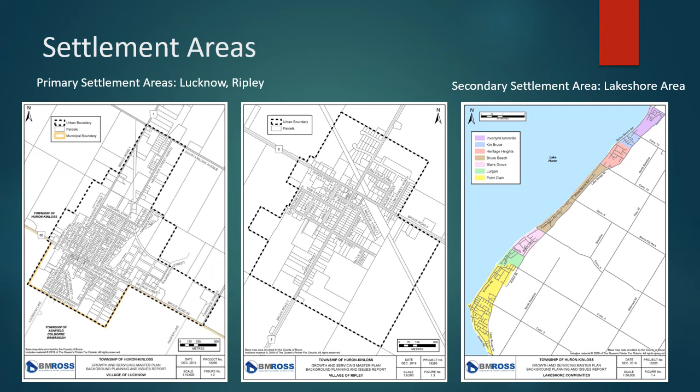For the master plan, we looked at a range of growth forecasts to determine what low, medium, and high growth might look like over the next 25 years in the settlement areas in Huron-Kinloss. The low forecast is based on the annual average number of building permits that have been issued for each area over the last 10 years. The medium forecast is a forecast that was done for the Nuclear Waste Management Organization as part of their base condition studies and is a forecast for Huron-Kinloss. And the high forecast are projections for Huron-Kinloss done by the County of Bruce for their official plan update.

For the medium growth forecast, the population for the township as a whole is forecasted, so we had to allocate the growth in terms of population and households for the different settlement areas based on the current distribution of the population. In addition to looking at the population, we also forecasted the number of new houses in terms of equivalent residential units, or ERUs. One ERU is equivalent to a single detached home, and an apartment, which generally tends to have fewer people and therefore lower sewage and water flows, is a little more than half of an ERU. So you will see this term throughout our presentation.

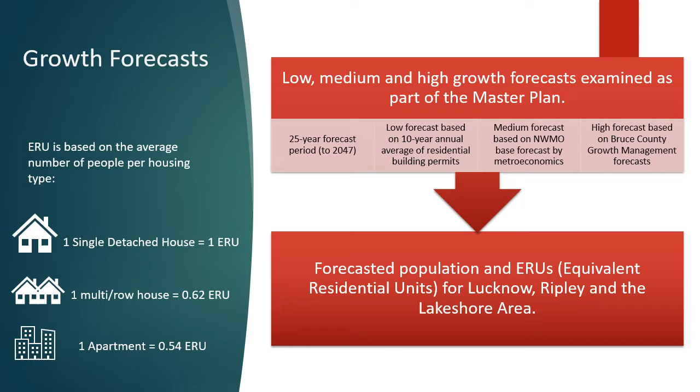Currently in Lucknow, there are 91 units proposed for development, with an additional 42 existing lots that could be built upon. There's also approximately 50 hectares of land that's either zoned residential or future development, which could accommodate over 750 additional residential units. These development areas are shown on the map on this slide. Given the amount of land available and forecasted growth, it does not appear that an expansion to the settlement area of Lucknow will be required over the next 25 years.

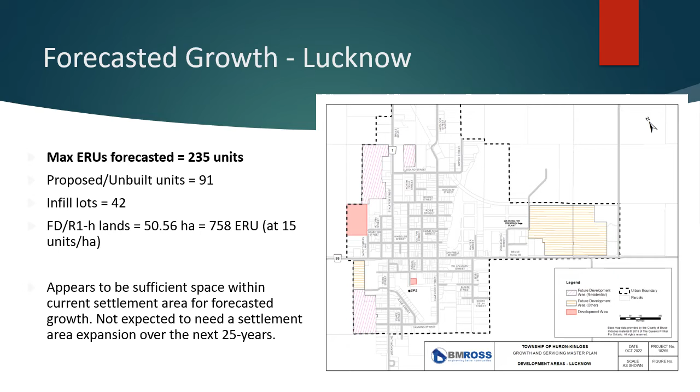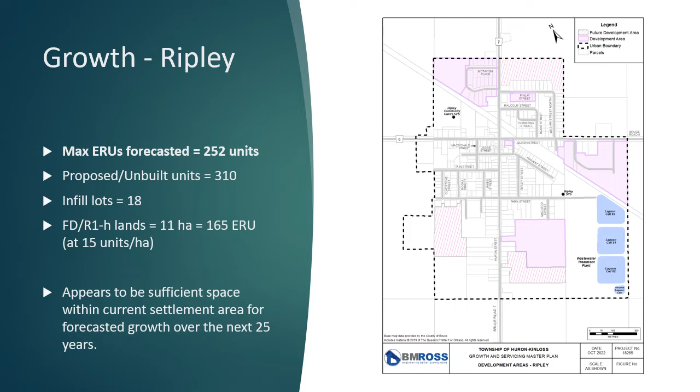In Ripley, the number of new residential units forecasted over the next 25 years ranges from 75 units on the low end to 252 units under the high growth scenario. This map shows the potential development areas in Ripley. Currently, there are 310 units of proposed development with 18 infill lots. There are 11 hectares of land zoned either for future development or residential development. Given that the high growth forecast is 252 units over the next 25 years, and the high number of potential lots in the community that could develop, there appears to be sufficient space in the current settlement area for the next 25 years of growth.

Moving to the lakeshore area, you can see the forecasted growth is much greater compared to Ripley and Lucknow, with the low forecast projecting 584 additional residential units over the next 25 years, and the high growth scenario forecasting an additional 666 units. Historically, most of the growth in Huron-Kinloss over the last 25 years has occurred along the lakeshore. This is likely due to the availability of land as well as a desire to be close to the lake as well as Kincardine. Over the next 25 years, it's expected people will continue to want to build and live along the lakeshore, and that there will be high demand in this area.

Currently, there are approximately 140 proposed and unbuilt units in the lakeshore area, as well as 195 existing vacant lots. There's approximately 42 hectares that's zoned residential, which, assuming a density of 5 units per hectare, would accommodate an additional 210 ERUs. Given this, over the next 25 years, there appears to be a deficit of land to accommodate the projected growth in the lakeshore area. If we look at the high growth forecast, the additional space required to accommodate the forecasted growth is about 24 hectares or 60 acres. This will likely require an expansion of the settlement area boundary over the next 25 years.

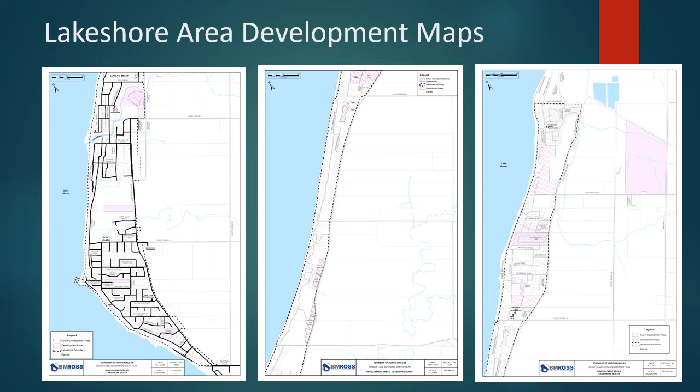When an expansion to the lakeshore settlement area will be needed will depend on the progression of development, or how fast development occurs. But before it can be expanded, a settlement capacity study will be required, as well as amendments to the Bruce County and Huron-Kinloss official plans.

As part of the background report, we looked at what constraints and opportunities there may be related to an expanded settlement area in terms of a potential location along the lakeshore. Some parts of the lakeshore have a very defined physical boundary created by the hill or shoreline bluff, and there are other constraints that we also considered, including hazard lands, wetlands, woodlands, as well as minimum separation distances from existing barns. We also needed to look for areas near existing infrastructure, as leapfrogging development is generally frowned upon from a planning policy perspective, as well as not being a very efficient use of infrastructure or very cost effective.

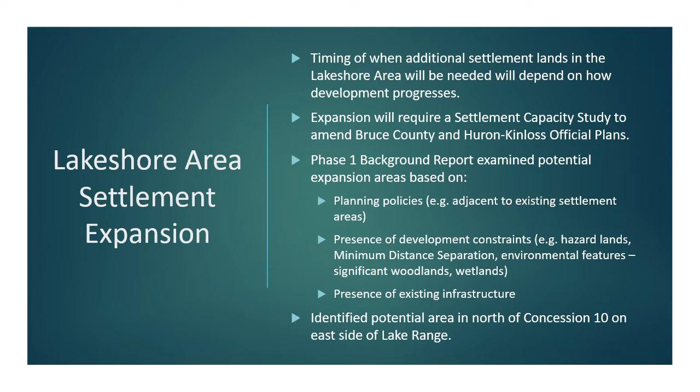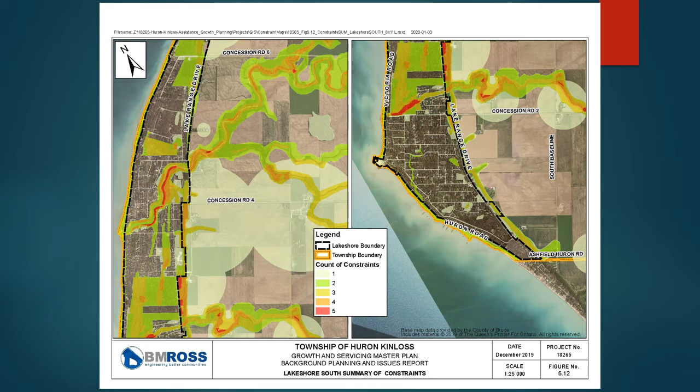In order to find areas where there may be fewer constraints, where there might be an opportunity to expand the settlement area, we created maps where we essentially layered on different constraints. The red and orange areas have more layers of constraints than the lighter green areas on these maps. These particular maps show the areas from Concession 6 south to Amberley Beach. Between Pine River and Concession 2, the area east of Lake Range is constrained, and this is primarily due to minimum distance separations from the barns that are there, which would make residential development in this area particularly unlikely, and there are also hazard lands associated with the Pine River.

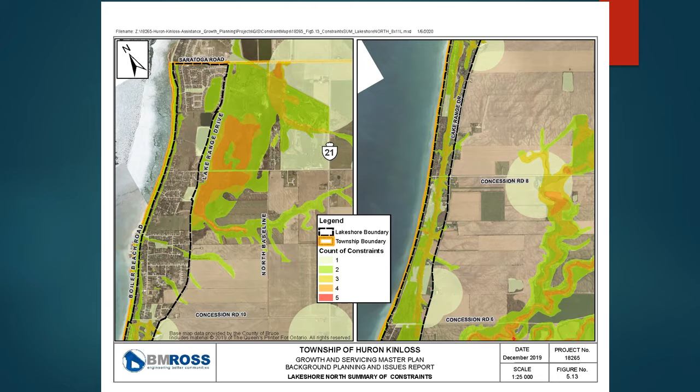North of Concession 10 on the east side of Lake Range is a potential area for future consideration of a settlement area expansion. As we can see, there's relatively few constraints there, and it is near existing infrastructure and well away from any existing agricultural facilities. I'm now going to turn it over to Andrew to discuss the reserve capacity analysis.

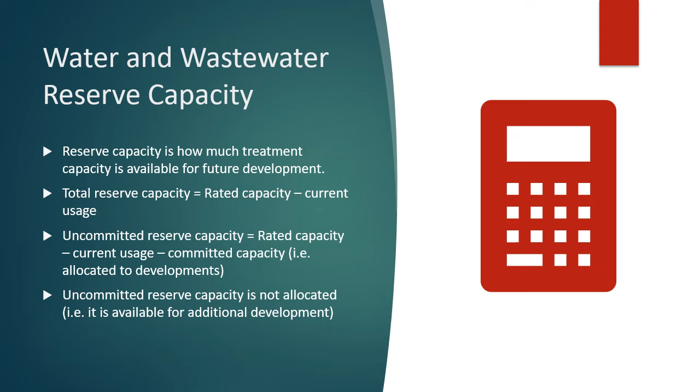When analyzing the potential impact of growth on existing water and wastewater infrastructure, and assessing needs for new or expanded infrastructure, we talk about reserve capacity. This is focused on treatment for both water and wastewater. Water storage is also assessed, though in a slightly different method. Total reserve capacity is effectively what amount of a treatment plant's capacity is not being used by existing real customers. Uncommitted reserve capacity is calculated as total plant capacity, subtract the existing usage, and subtract the usage that's forecasted for development commitments. Existing usage is taken from recent actual data, and forecasted use is based on typical water demands or wastewater flows for an equivalent residential unit, or ERU.

This table summarizes available or rated total capacity for major water and wastewater infrastructure. It also summarizes current usage, current total reserve, and how much of that reserve is allocated to commitments. Finally, the uncommitted reserve in terms of cubic meters per day, as well as what number of ERUs that cubic meters per day represents. Key takeaways from this slide are, for water supply, all systems have a significant uncommitted reserve. The Lucknow Wastewater Treatment Plant is operating at approximately 75% of its capacity. More than half of the current total reserve is committed, with the uncommitted reserve being sufficient for an estimated additional 100 ERUs.

The Ripley Wastewater Treatment Plant is operating only at about 60% of its capacity, but there is nearly as much committed capacity as there is existing actual usage at the plant. As a result, there is a perceived deficit of nearly 100 cubic meters per day of reserve, which in this case is also approximately 100 ERUs. The next several slides will illustrate each of the water and wastewater treatment system capacities and projected usage over time as growth occurs. Graphs will illustrate capacities in terms of current ERU usage values.

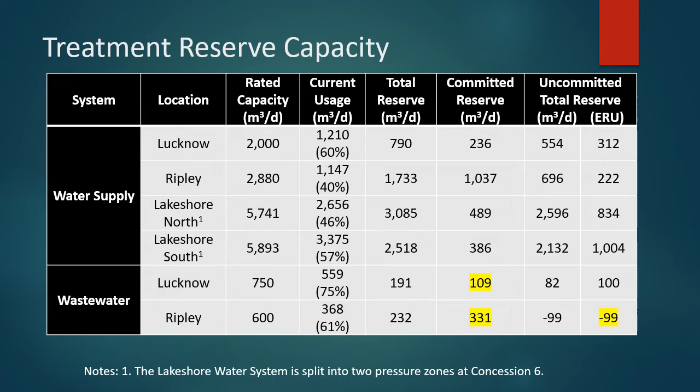Lucknow water treatment capacity. Looking at the left-hand side of the graph, currently we can see there are approximately 675 ERUs serviced. The committed capacity is a little over 800 ERUs, whereas the total capacity would allow for over 1,100 ERUs. At even the most aggressive growth forecast, the existing system capacity would be sufficient beyond the year 2045. Therefore, there is no apparent need for capacity expansion at this time. It is noted that well number 5 is not in an ideal location due to its site size, and replacement would likely occur at an alternate location yet to be determined.

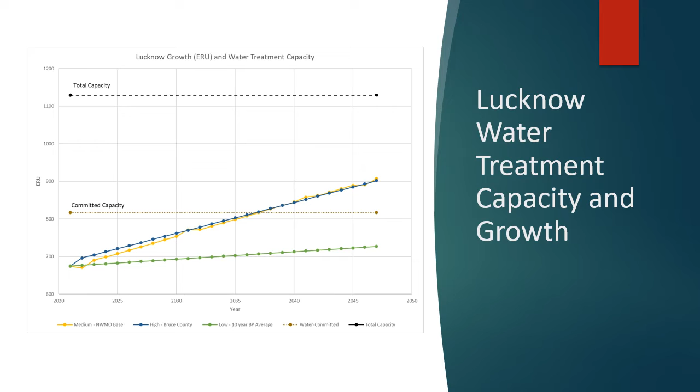Lucknow wastewater treatment capacity. The same existing and committed ERUs apply as for the case of water treatment. Even though uncommitted reserve is sufficient for only 100 additional ERUs, at even the most aggressive growth forecast, the existing system capacity would be sufficient just beyond 2045.

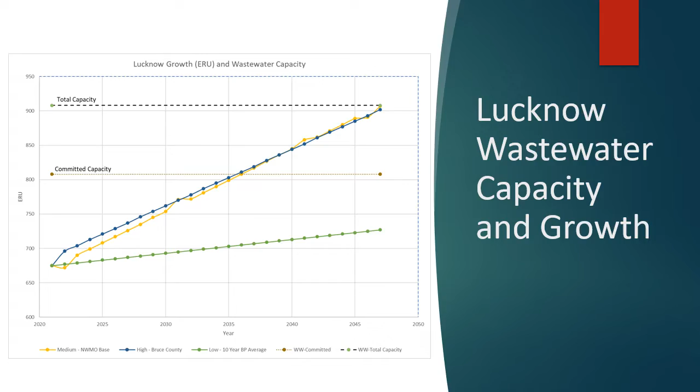Ripley water treatment capacity. The total capacity of the system is significantly greater than the committed capacity. It is again noteworthy that committed capacity in Ripley is nearly double the actual current usage, due to the large number of development commitments that create no real demand at this time. At the most aggressive growth rate, the system capacity would be sufficient well beyond 2045.

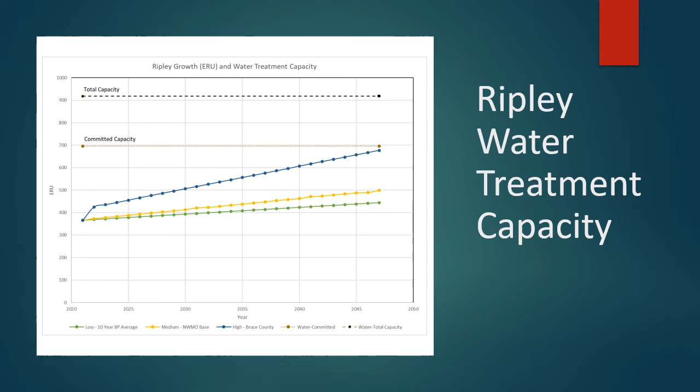Ripley wastewater treatment capacity. This plant is considered to be overcommitted, despite current flows being well under the total capacity. Though the number of development commitments is large, the fastest growth rate projection forecasts that actual flows to the plant would not reach the current rated capacity until approximately 2039. It is recommended that this situation be monitored with regular updates to the reserve capacity calculations.

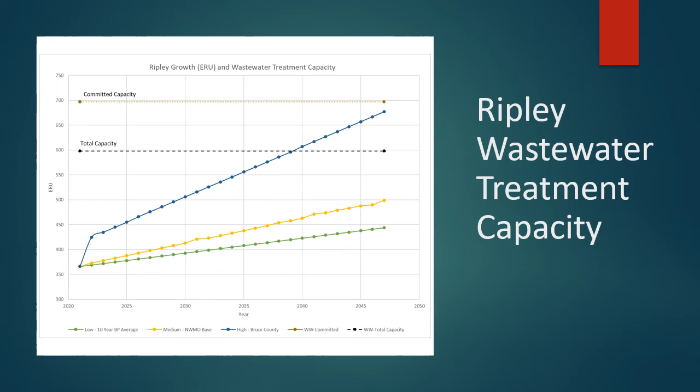When planning for future plant expansion, it will be important to keep in mind that the process, all the way from class environmental assessment to completion of construction, may take 3 to 5 years. Lakeshore water treatment capacity. The total capacity of all well subsystems in this drinking water system is substantially greater than current, committed, and forecasted demands.

Looking at water storage capacity, the storage facilities for all 3 drinking water systems were reviewed. Ripley has a relatively new elevated water storage tank, and there will be a new elevated water storage tank in Lucknow in the near future. In both of these communities, the new tanks have sufficient volumes for decades of forecasted growth.

The lakeshore drinking water system has a single water standpipe with a total volume of approximately 1,500 cubic meters. The actual volume available to the system will be less, depending on the location of the demand, due to pressure loss as water flows from the storage facility to the location of the demand.

Regardless, even if the full volume of the lakeshore standpipe were available for use, it would be less than that recommended by Ministry of Environment, Conservation and Parks design guidelines for drinking water systems. The recommended value for existing customer base plus commitments is nearly 4,500 cubic meters, or 3 times the current standpipe volume.

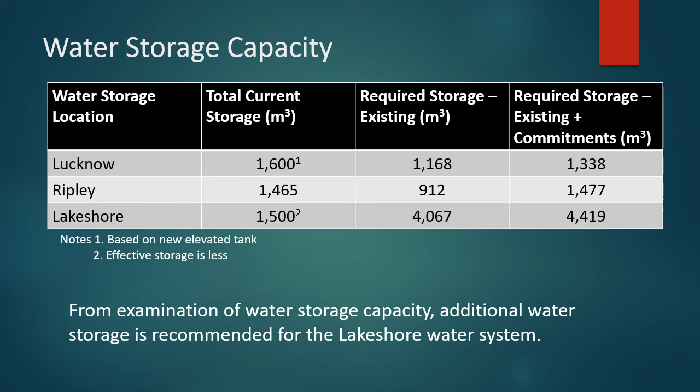In summary, for the Ripley water storage and treatment analysis, the existing infrastructure is considered adequate for the forecasted needs. For wastewater treatment, the plant is considered overcommitted. There are a number of items the township may want to consider in this regard. One would be to implement an allocation policy.

The goal would be to avoid being in the current position, where the township is committed to provide servicing capacity without any way of knowing when the subject development lands will actually be developed, and no mechanism to recover that committed capacity for developments that don't proceed in a timely manner. This could be achieved by having a time frame during which approved developments must occur, or else committed capacity is lost, or by having developers pay upfront to be granted capacity allocation.

We also recommend the township review the reserve capacity calculations on a 5-year basis at most, and more frequently if development begins to occur at faster than forecasted rates. Wastewater treatment plant capacity expansion may be required in approximately 15 years, assuming the high growth scenario. Given the time required to complete the process from class environmental assessment all the way through to construction, it may be warranted to commence the EA in approximately 10 years.

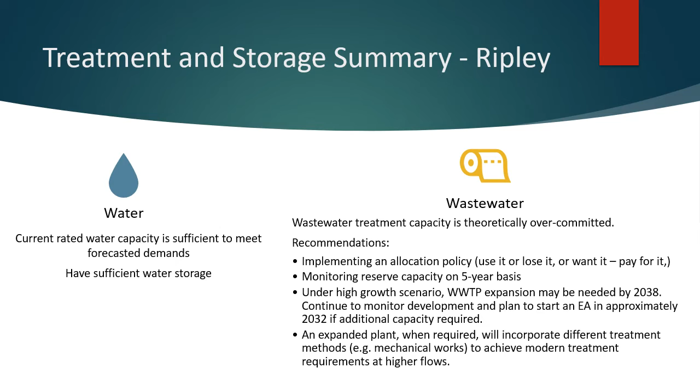Regardless, at a high level, in today's dollar figures, we would anticipate an expanded and upgraded plant would cost in the order of $10 million to $15 million. We also completed a review of the Ripley water distribution system and trunk wastewater collection system. The figure on the right illustrates the water distribution system and development areas.

In general, no issues of significance were observed, but it is noted that available fire flows at the east end of the community are limited to values less than typical industrial land targets. This is a result of water main size leading to this area and lack of water main looping in the area. Future development lands at the south and southwest part of the community will require water main looping to provide adequate pressure under peak demands and adequate fire flows.

The figure on the left illustrates the wastewater collection system and development land areas. Again, in general, no issues of significance were observed. It is noted that due to topography, a portion of future development at the north end of the community would require a sewage pumping station for sanitary service.

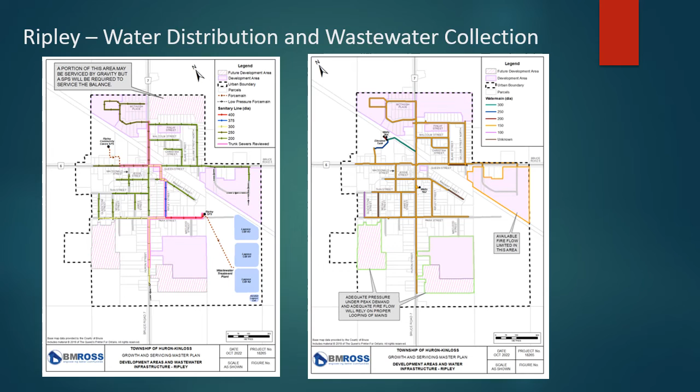In summary, for Lucknow water storage and treatment, the existing well capacities and forthcoming elevated water storage tank will be considered adequate for the forecasted needs. For wastewater treatment, the plant may reach capacity in a little over 20 years under the high growth scenario. It is recommended that reserve capacity calculations be updated on a regular basis along with those for Ripley.

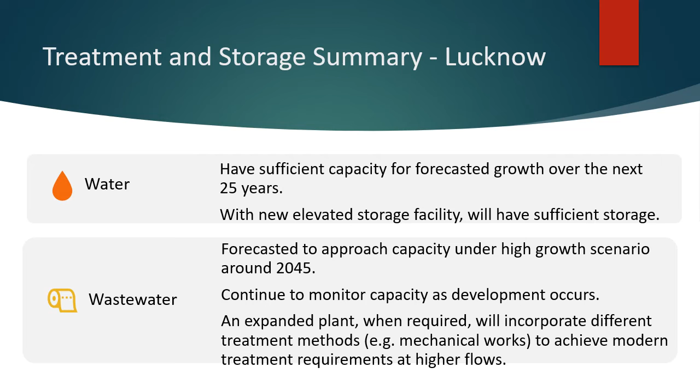Eventually, when a wastewater treatment plant expansion is required, we note similar comments apply for Lucknow as they did for Ripley, namely that treatment requirements and the necessary technology to achieve those requirements will differ from that of a lagoon-based system. Though further study is required to establish what an upgraded plant would look like, we would again suggest that an upgraded plant may cost in the order of 10 million to 15 million present-day dollars.

The water distribution system and trunk wastewater collection system for Lucknow were also reviewed. The figure on the left illustrates the water distribution system and development areas. In general, no issues were observed, though it is noted that future development lands at the eastern limit of the urban boundary are remote from the new storage facility site and are beyond a current dead-end water main. Proper servicing to this area would need to consider adequate looping of water main.

The figure on the right illustrates the wastewater collection system and development areas. Two items to note. 1. Future development lands at the eastern limit of the urban boundary would be serviced by a new sanitary sewage pumping station, discharging directly to the treatment plant.

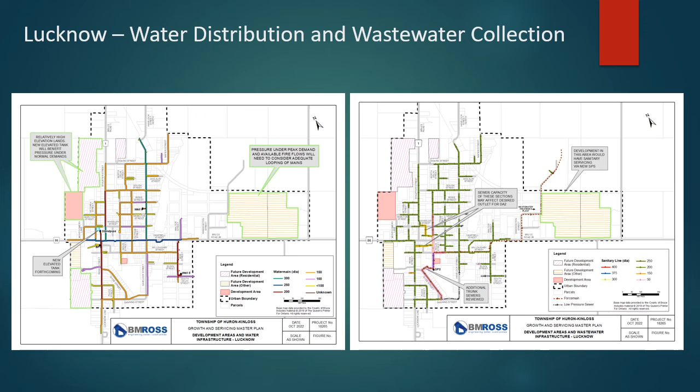2. There are two sewer sections discharging to Ingalls Street that are at minimum size and capacity. While we believe it is likely that these sewer sections have a combined capacity that is sufficient for development lands in the western part of the community, it will be desirable to properly direct development land flows in a way that allocates flow where the sewer capacity is available.

For the lakeshore water system, supply capacity is considered adequate for the forecasted growth ranges. Additional water storage is recommended for the current customer base as well as for development. Selection of a preferred location and type of storage would be carried out through a class environmental assessment process. At this time, general initial comments with respect to siting a facility include a preference to locate north of Concession 6 in order to spread out the existing and new storage facility locations. The next slide illustrates key areas of the Lakeshore North and South systems, along with some comments in this regard.

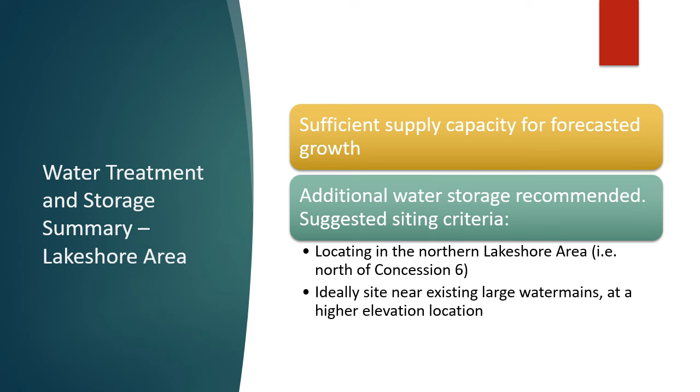In addition to spreading out multiple storage facilities, it is ideal to locate storage adjacent to large diameter water main. This allows maximization of the storage facility during high demand events, for example, a fire demand situation. This is achieved by locating near existing large diameter mains if possible. For example, note the existing standpipe on the right-hand side figure. It's near dark blue and red color water main, which denote larger diameter pipes. A new facility in the north would ideally be located near existing large diameter mains. Alternately, new trunk water main would need to be constructed, connecting the new facility to existing large diameter pipe.

It's also ideal to locate storage on higher elevation grounds in order to maximize the use of existing topography. This would allow greater flexibility in consideration of different storage facility types, for example, an elevated storage structure or a reservoir with a booster pumping station. Locating at relatively low ground elevations would almost certainly require a reservoir and booster pumping station.

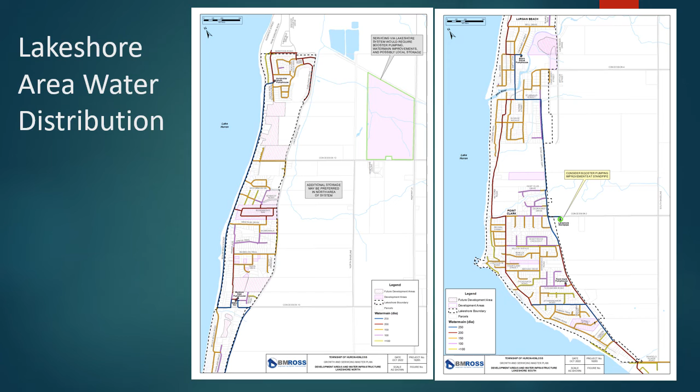Although further study is required to confirm many of the details associated with a new storage facility, we would suggest that the township consider probable costs in the order of $6 million to $8 million for additional storage, plus whatever costs are associated with connecting the new facility to the existing system with new water main.

Currently, in terms of wastewater servicing along the lakeshore, the majority of the area is serviced by on-site private services, otherwise known as septic systems. There are a small number of residences in Inverlyn and Huronville, as well as along Boiler Beach Road, that are connected to the Kincardine sewage system.

Under the provincial policy statement, there's a hierarchy of services, with full municipal water and wastewater services being the preferred method of servicing for areas of new development. Private services are the least preferred form of servicing. Where municipal services aren't feasible or available, private communal systems are the next preferred option. Partial services, so in areas where you might have municipal water and private septics or vice versa, are only permitted in limited situations, such as infilling and minor rounding out, and where there are no negative impacts over the long term. If an expanded settlement area along the lakeshore is required, a servicing strategy for wastewater will be needed.

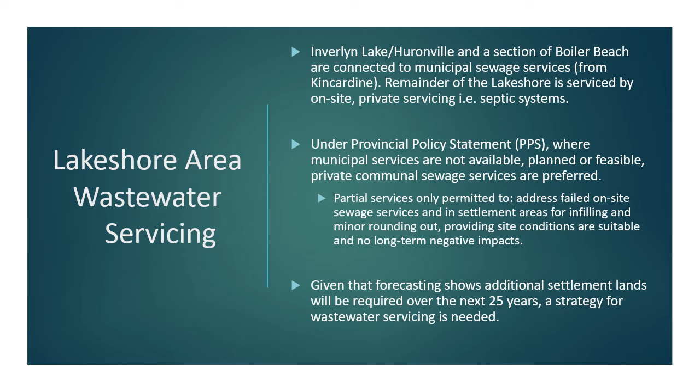We have identified 4 potential servicing strategies or alternatives to be considered for the lakeshore area. The first is status quo and maintaining private services. Under this strategy, infilling in the existing settlement area could continue, and it's expected that the septic inspection program would also continue to demonstrate and address concerns around long-term impacts given the concentration of septic systems in the area. It's unlikely an expanded settlement area would be permitted, and that this would ultimately limit growth in the lakeshore area.

A second option is to extend services from Kincardine. An extension of sewage services to the entire lakeshore area is not likely given the distance as well as the potential amount of capacity that this would take up at the Kincardine treatment plant. Potentially, if an expanded settlement area is within a reasonable distance of Kincardine, it could be serviced, but Kincardine does have its own capacity demands and needs, and given this, this alternative is not considered likely or feasible.

A third option is to construct a new sewage treatment and collection system to service either the entire lakeshore or a portion of it. Servicing the entire lakeshore area is generally not considered feasible due to the very high cost of a collection system, as well as the lack of a potential treatment facility site. The fourth option is a combination of the existing status quo as well as a communal system. Under this scenario, the existing lakeshore area would remain on private septic systems, and the expanded settlement area would likely be serviced by a communal or decentralized sewage system.

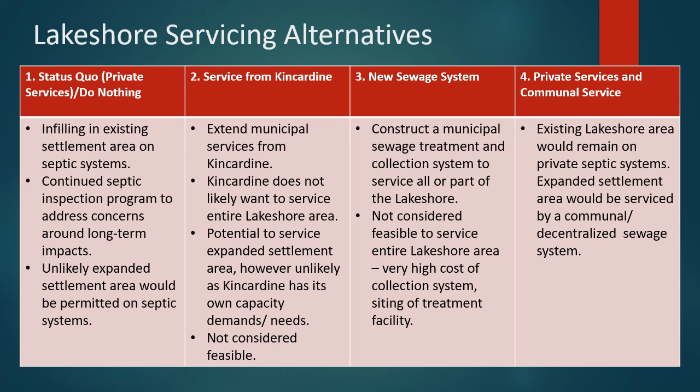Of the 4 wastewater servicing strategies for the lakeshore, the fourth, which was use of private services in the existing settlement area as well as a communal or decentralized system for an expanded settlement area, is considered the most practical and feasible. Under this strategy, it would allow for continued development in the existing settlement area on septic systems, but it is expected that the septic inspection program would need to continue in order to demonstrate the active management of the systems in the area as well as the absence of any long-term impacts or issues.

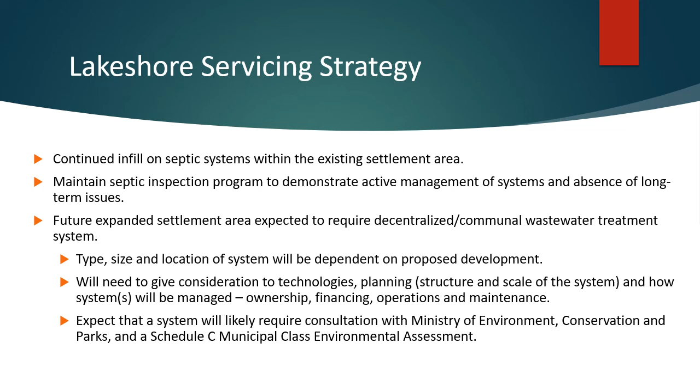Any future expanded settlement areas would be expected to require a decentralized or communal wastewater treatment system. The exact type, size, and location of the system would ultimately be dependent on the proposed development. And at the time of developing this decentralized or communal wastewater treatment system, consideration would have to be given to potential technologies as well as how the system will be managed, so in terms of ownership, financing, as well as operations and maintenance. It's expected that before any system is built, it would require consultation with the Ministry of Environment, Conservation and Parks, as well as a Schedule C municipal class environmental assessment.

As part of the master plan, we've identified a number of projects that we would recommend the township consider over what we've called the immediate future, the near term, which is 5 to 10 years, as well as the long term over the next 10 to 25 years. In the more immediate future, we recommend that the township consider developing and implementing an allocation policy for water and wastewater. Such a policy would direct how water and wastewater capacity gets allocated and how long that capacity is essentially held for. We also recommend that in Ripley, given the theoretical overcommitment of the sewage capacity, the wastewater reserve capacity calculations are monitored or updated on a 5-year basis.

Over the next 5 to 10 years, it's recommended that the township consider adding additional storage to the lakeshore water system. This will require a Schedule B municipal class EA for a new storage site. As well, it's recommended that the well in Lucknow, well 5, is replaced, and that's based on its age and condition.

Over the longer term, so the next 10 to 25 years, it's recommended that the township consider preparing a settlement capacity study, which would examine where the lakeshore settlement area could be expanded. And then over a much longer term, we might be looking at potential expansions of the Ripley wastewater treatment plant in and around 2039, and then Lucknow towards 2045. The timing of when to start the EAs and studies that would be required ahead of constructing these expanded facilities will ultimately be dependent on how development progresses.